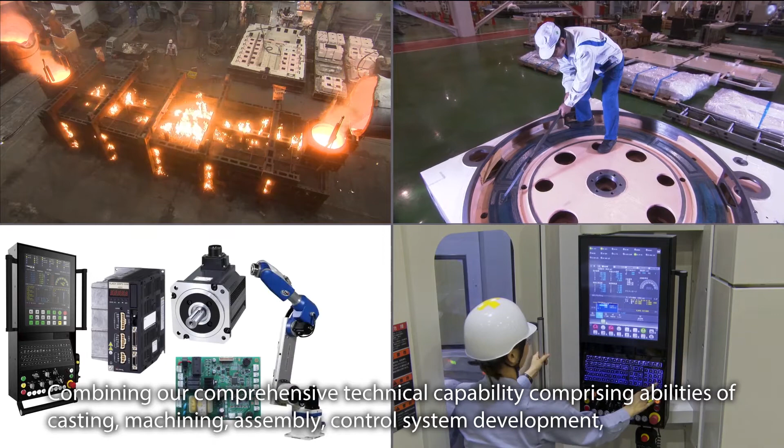Toshiba Machine is one of few machine makers that can manufacture from precision machines to large-size machines in consistent manufacturing. Combining our comprehensive technical capability comprising abilities of casting, machining, assembly, control system development, and substantial services with IoT and AI, we will provide solutions to contribute to the future.

machiNet is a platform to realize Toshiba Machine's IoT concept, IoT+m. machiNet will provide smart machines to digitize changes in events to ensure machining quality. Production optimization can be achieved according to each facility's conditions by maximizing production throughput based on IoT collected data and cooperating with upper computer.

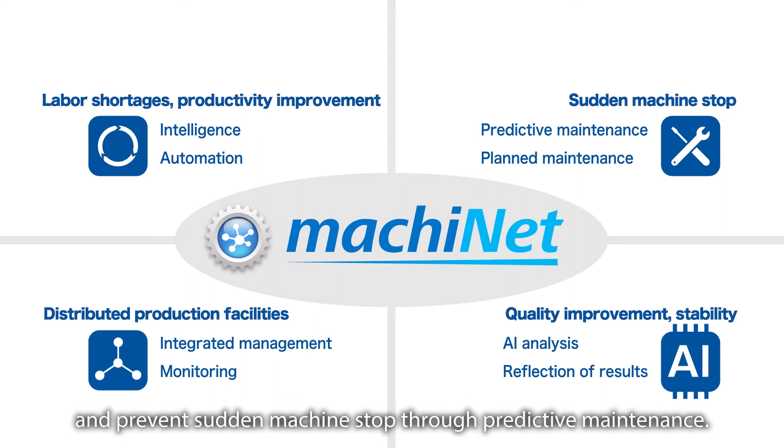machiNet will improve productivity with automation and intelligence, solve labor shortages, and prevent sudden machine stop through predictive maintenance. Distributed production facilities will be managed in an integrated way to realize quality improvement and stability.

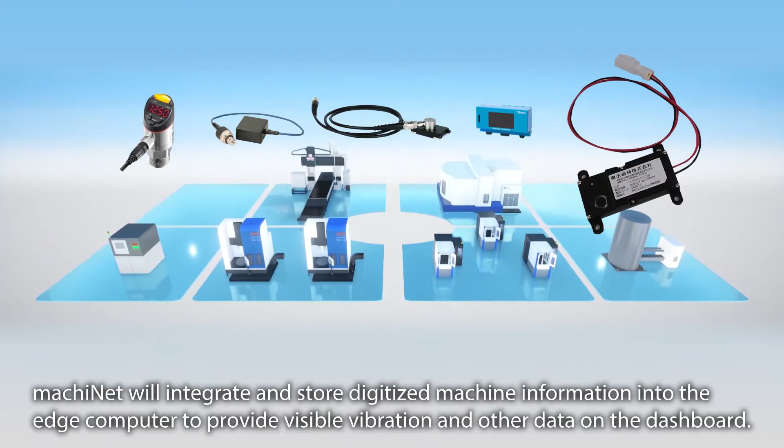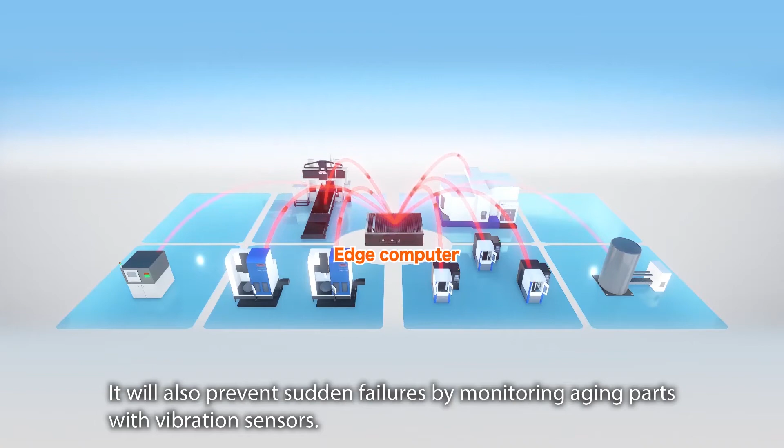machiNet will integrate and store digitized machine information into the edge computer to provide visible vibration and other data on the dashboard. It will also prevent sudden failures by monitoring aging parts with vibration sensors.

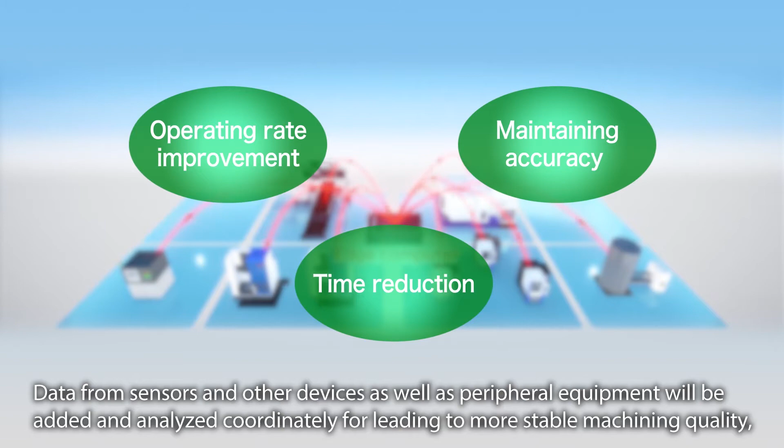Data from sensors and other devices, as well as peripheral equipment, will be added and analyzed coordinatedly for leading to more stable machining quality, reduced power consumption, and improved productivity.

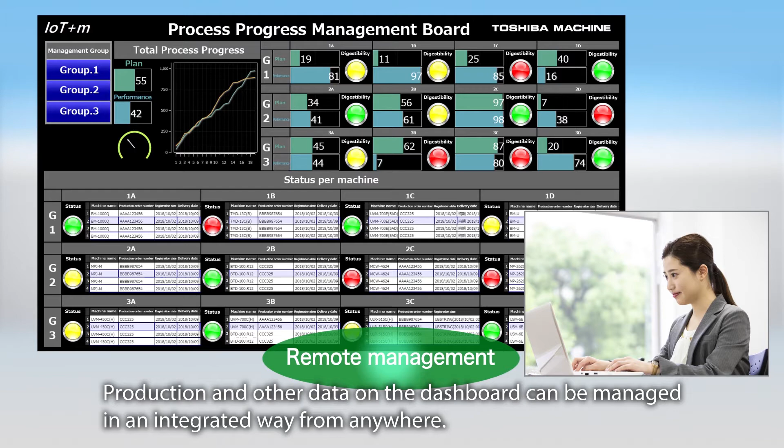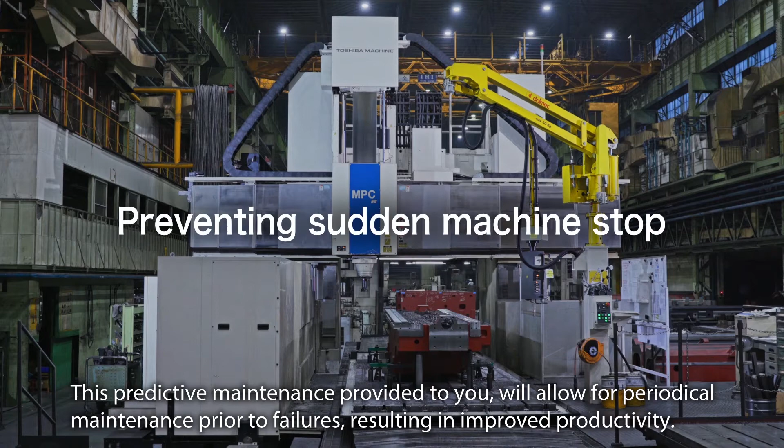Production and other data on the dashboard can be managed in an integrated way from anywhere. Data analysis and diagnosis will also help predict machine degradation and failures. This predictive maintenance provided to you will allow for periodical maintenance prior to failures, resulting in improved productivity.

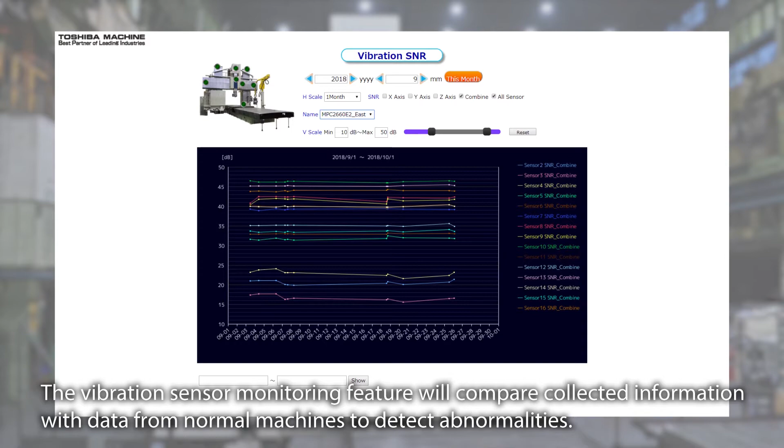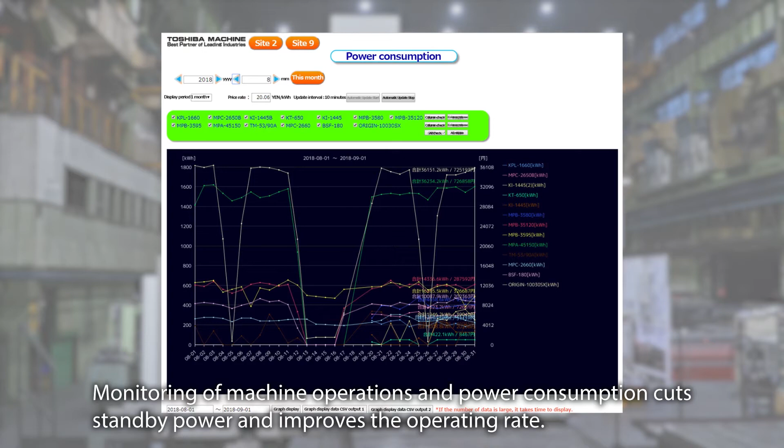The vibration sensor monitoring feature will compare collected information with data from normal machines to detect abnormalities. Monitoring of machine operations and power consumption cuts standby power and improves the operating rate. Temperature control leads to machining quality improvement and stability.

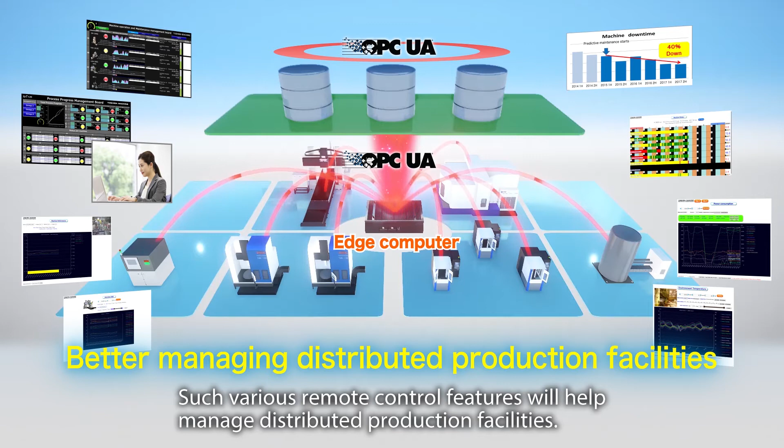Such various remote control features will help manage distributed production facilities. Integrated and stored data can be extracted as necessary to be used for customers' upper computer by the OPC-UA Open Communications Standards.

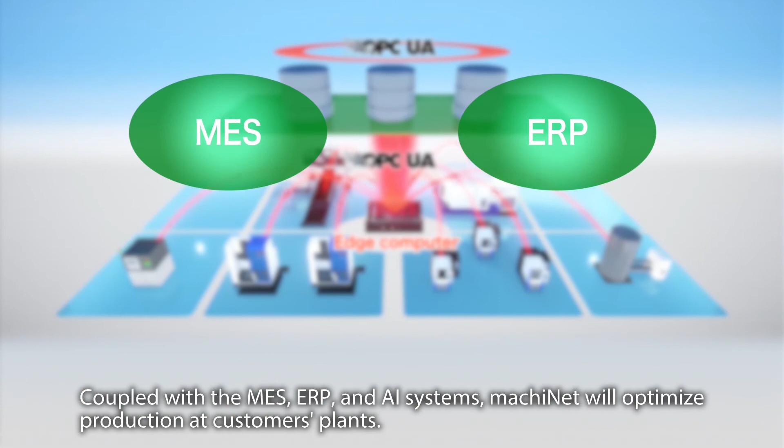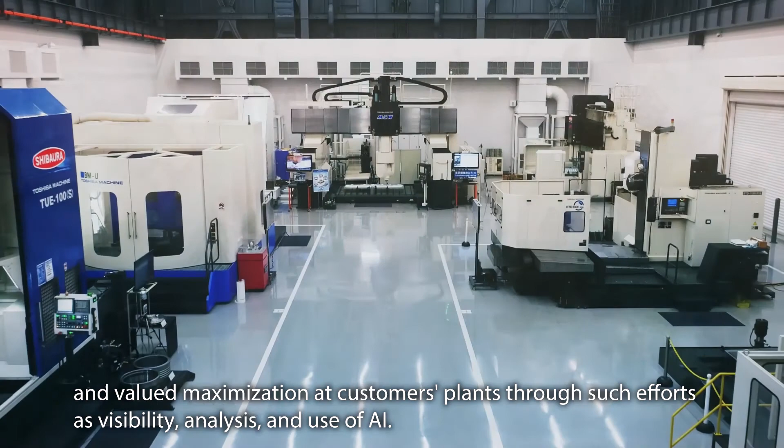Coupled with the MES, ERP, and AI systems, machiNet will optimize production at customers' plants. Toshiba Machine will continuously contribute for various smart facilities and valued maximization at customers' plants through such efforts as visibility, analysis, and use of AI.